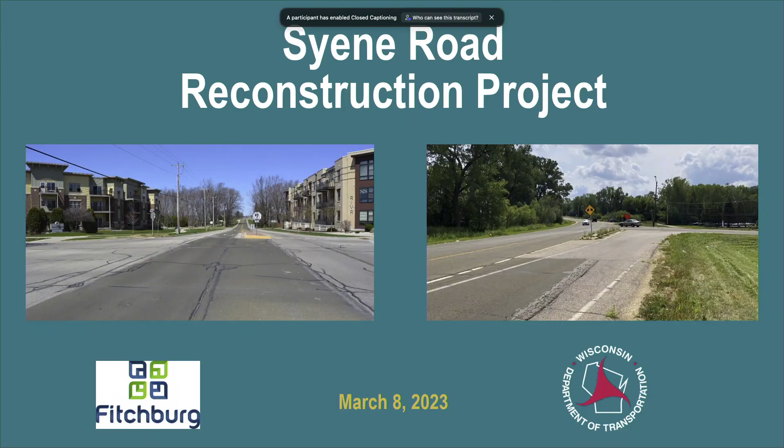I'm Tim Volker. I work for the city of Fitchburg. I'm the director of public works, city engineer. I've been here about 6 weeks now, and I'm getting very well acquainted with this project.

So here we also have our consultants on the project. You might recognize some faces from previous meetings. KL Engineering, we have Kevin.

I'm Kevin Wayner with KL Engineering. Been with KL for about 8 years and doing this for about 10. And I have a microphone, so I'm good.

I'm Samantha Herheim. I'm with KL Engineering. Kevin is our traffic engineer on the project. I'm the design project manager. We do also have Josh from our office who is working on construction oversight for phase 1.

Another important part of our team, someone who is not here with us tonight, is Lorraine Betzel. She is the Wisconsin Department of Transportation Local Program Project Manager for the northern section of the project, from West Clayton Road to the McCoy Road intersection.

The presentation tonight will follow this agenda, but before we get started, we just wanted to acknowledge the pedestrian fatality that happened on this road early this year. We don't have any of the accident data yet, but when that accident report becomes available, we will review and see if there are any improvements we can make with the project.

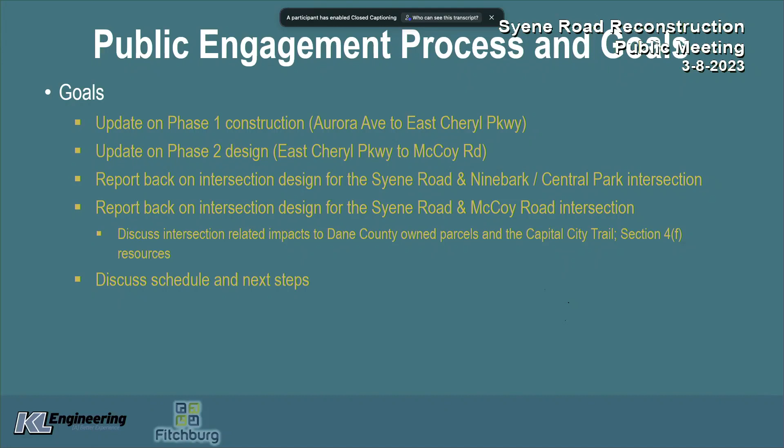The goals for tonight's meeting: we want to provide an update on phase 1 construction, that's the section between Aurora Avenue and East Cheryl Parkway, and an update on phase 2 design, which is all of the work north of there. We want to report back on intersection design for the Syene Road and Ninebark / Central Park intersection, report back on intersection design for the Syene Road and McCoy Road intersection, discuss intersection-related impacts associated with that intersection design, and talk about schedule and next steps.

That southern portion that's under construction is Aurora Avenue to East Cheryl Parkway, shown in red on this location map. It's under construction currently. The East Cheryl Parkway to West Clayton Road segment we're showing in yellow. That portion has local funding for construction and is planned for 2024 construction.

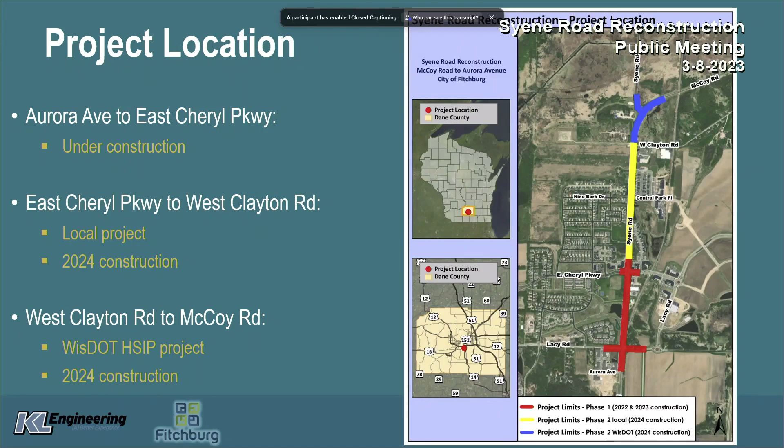The West Clayton Road to McCoy Road section, shown in blue on this map, has Wisconsin Department of Transportation Highway Safety Improvement Program funding and is planned for 2024 construction. There are some requirements for the Department of Transportation funding project, so we'll cover those throughout the slides. The slides actually look just a little bit different so we can differentiate between the two funding sources.

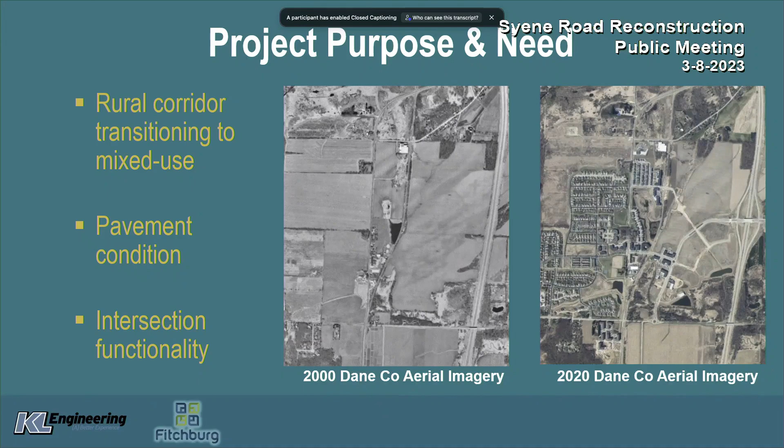The need for this project is really that this was a rural corridor that over the last couple decades has transitioned into a mixed-use, more urban corridor. We need to address the pavement condition and also the intersection functionality. Now I'll turn it over to Kevin to talk a little bit more about the McCoy Road intersection specifically.

McCoy Road intersection is the location of some crash patterns related to, in our opinion, some of the congestion. Making that left turn from Syene Road was one of the reasons for this proposed change. There's delay for southbound traffic since it's not a continuous movement.

Syene Road tees into itself in a way and meets up with McCoy Road. It's kind of funny, incidentally, at one point Syene Road was continuous north-south, so this would take things back to the way they were at one point.

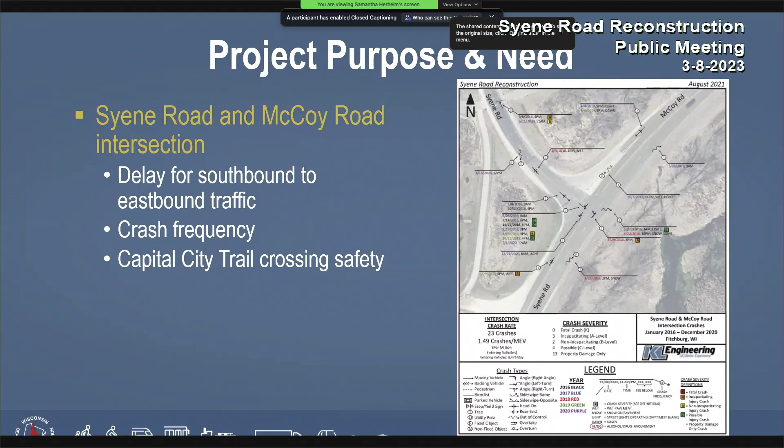The big reason to take McCoy Road and make Syene Road continuous is related to the Capital City Trail crossing. It presents a good opportunity for signalization to add a traffic signal at that crossing movement.

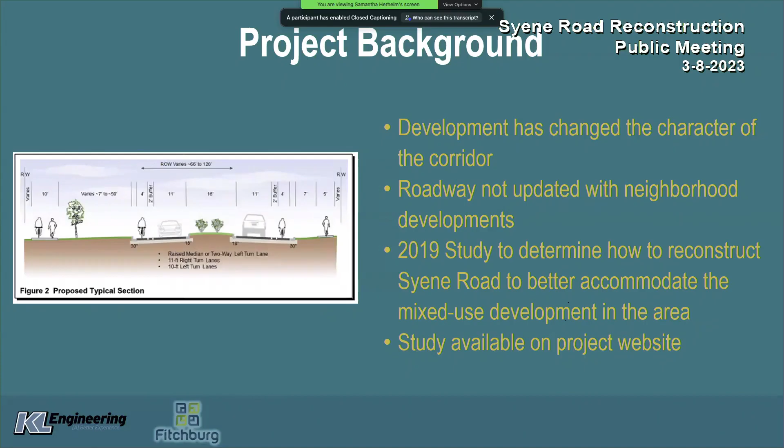We will include the link to the project website at the end of the presentation. In 2020, KL was hired to work on the design, starting in late 2020. We started with the recommendations from that 2019 study and worked on additional concepts and alternatives.

We also had some geotechnical exploration that happened, and found that additional subsurface improvements underneath the roadway would be needed, which increased the cost estimates. So we revisited those concepts and alternatives to see if there were other cost-saving measures that could be explored.

The project was split into phases in 2021. This allowed additional time for public engagement with city staff. The northern portion, shown in blue, was able to apply for and receive federal funding through the Wisconsin Department of Transportation Highway Safety Improvement Program. The middle portion, shown in yellow, also applied for federal funding but was not successful.

Phase one, the red section, started construction in 2022. That construction is currently shut down for the winter, mostly, although you will see some work happening outside of the roadway. The contractor is working on stormwater management improvements, and there are some private utility relocations happening. Construction will start back up in the spring, we think April 1st, but that's tentative and will be dependent on weather.

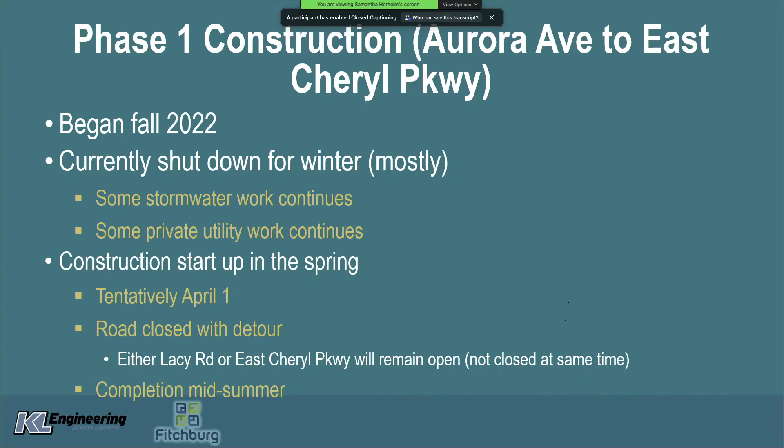When construction starts back up, there will be a road closed with sign detour condition. For local traffic, we'll either have Lacy Road closed for construction and have East Cheryl Parkway open, or we'll flip-flop, so one of those intersections will always be open for local traffic. We expect construction to be completed mid-summer.

Improvements along the corridor include sanitary and water main adjustments, a short water main extension near West Clayton Road, stormwater management improvements, lighting at intersections and select locations, speed reduction measures, which we'll talk about later, and some vertical alignment improvements, which we'll also discuss.

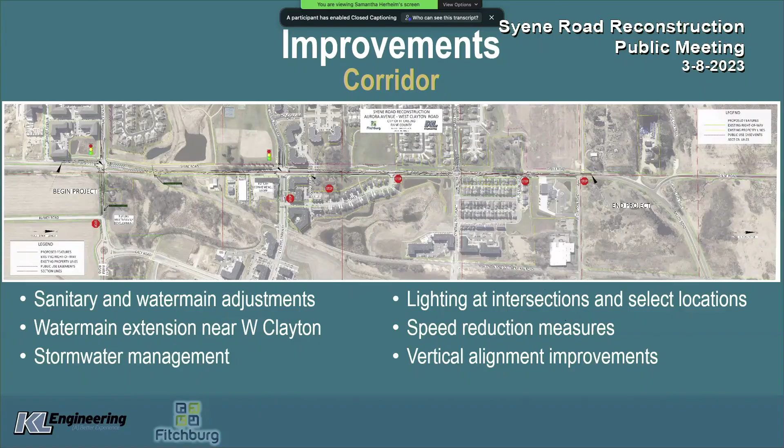The roadway will have a 10-foot travel lane, a 6-foot bicycle lane, two feet of which will have a painted buffer. There'll be painted and raised medians approaching intersections, an addition of curb and gutter, and the sidewalk on the east side will primarily remain in place, although we do have to do some spot improvements.

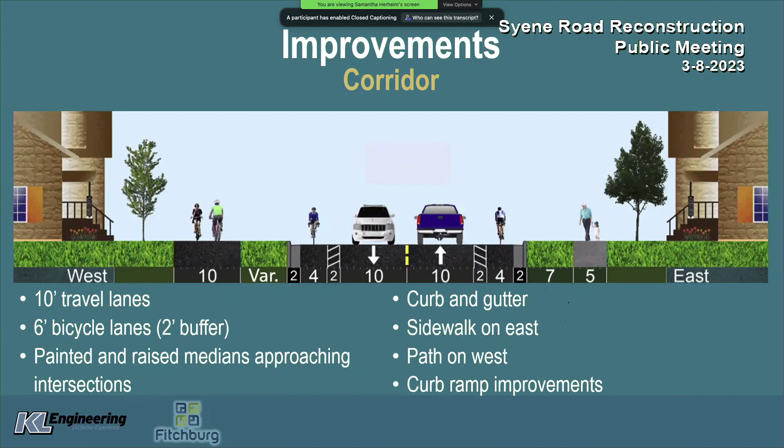Same for the path on the west side—it'll primarily remain in place with some spot improvements, and there will be curb ramp improvements at the intersections. Now I will turn it over to Kevin to talk about intersections.

Starting from the No Oaks Ridge intersection, going over some of these proposed improvements and explaining what they're expected to do. At this intersection currently, in the rural configuration, there's a bypass lane, which is a typical treatment for an intersection like this. As we urbanize the corridor, the intersection is currently planned to have a left turn lane.

This would help bring more predictability to traffic. People will use the left turn lane every time—there won't be a will-they-won't-they situation of using the bypass lane or not.

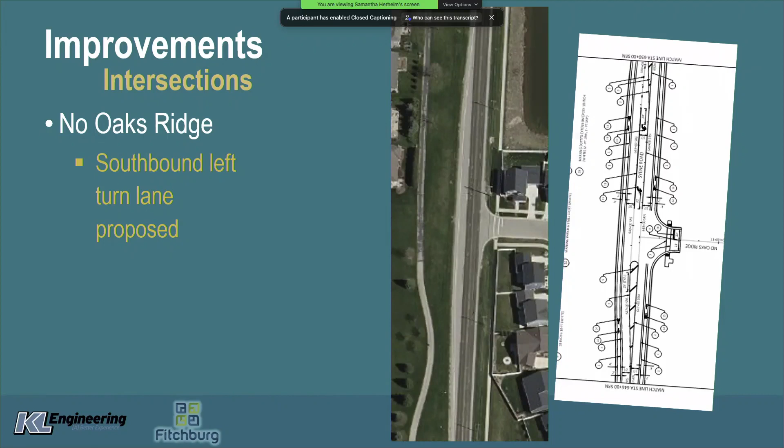So this helps assign where people should be as they're utilizing the intersection, which should be a benefit to pedestrians as well, just increasing predictability of drivers in the area.

Moving on to the Ninebark intersection, this is currently proposed as a roundabout. Some features include its size - it's somewhat smaller than a typical roundabout, certainly not a big DOT roundabout you'd see at an interchange. One benefit is to promote slower speeds, which is a safety benefit to pedestrians who are trying to judge crossing traffic.

This configuration would offer bicyclists the option to exit the bike lane and use the shared use paths to transit the intersection. Bicyclists, of course, would also have the option to transit the intersection in the travel lanes with other vehicles.

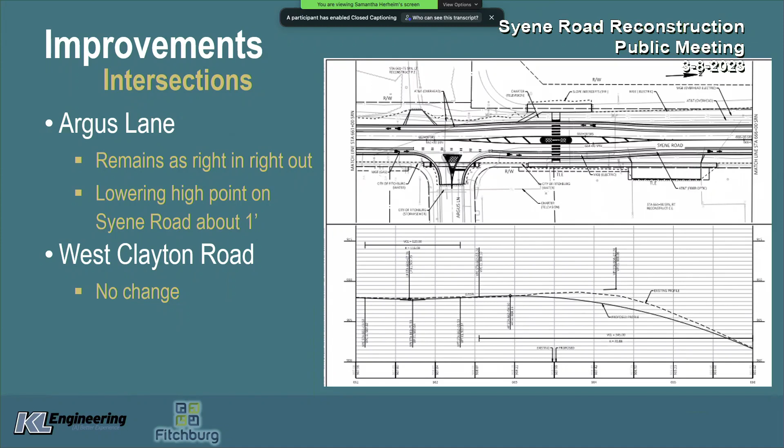Argus Lane is currently configured as a right-in, right-out intersection, with that triangular island helping enforce the access restriction for left movements. That's proposed to remain, with similar geometry after construction. I'll get into it later, but this is a location, or nearby a location, of a potential mid-block crossing.

This intersection is also near that vertical curve. This profile is showing the elevation of the roadway as you travel to the north. The dashed line is the existing profile, and the solid line is the proposed roadway's vertical configuration, which would help with visibility when you're looking over that hill.

Just to mention Clayton Road before I move on to McCoy, no consequential changes to the configuration of that intersection are planned right now.

Backing up a little bit, this is the section of the project that would be funded through the WisDOT HSIP funds, so this is a slightly different segment of the project. The current planned improvement would be to align Syene Road so it's continuous northbound, southbound, and McCoy Road would tee into it. The intersection would be controlled with a traffic signal.

One of the features would be taking the Cap City Trail, which currently crosses closer to the trailhead, away from the intersection, and bringing it to the intersection to provide a signalized pedestrian crossing. This would be similar to MM and McCoy Road, which was recently reconstructed.

There are signal timing and phasing options to help so that cyclists don't get stuck at that pork chop island, so in a sense it's a single stage crossing despite having to transit through the pork chop. These islands are generally recommended to help funnel traffic, make things safer for pedestrians, provide a refuge for pedestrians, and limit which way you have to look for approaching traffic when judging whether it's safe to cross.

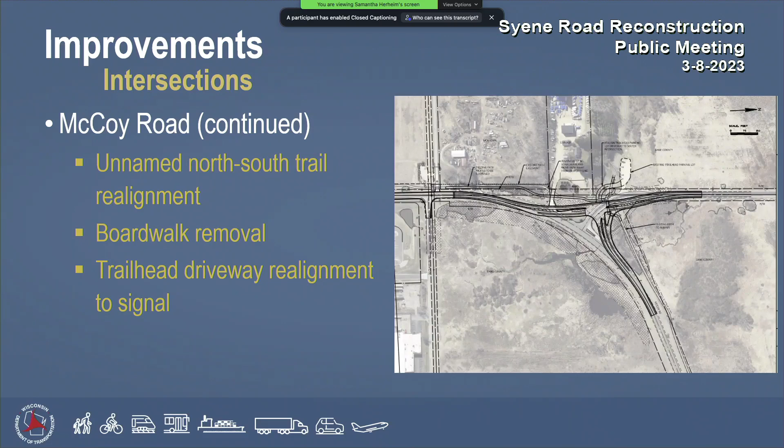There's a lot of requirements associated with the federal funding going into this intersection realignment, so some things we're required to evaluate and consider are the impacts to the Dane County parcels in this area and also the Capital City Trail.

We've done quite a bit of coordination already with Dane County and with the DNR. What we're planning at this point is that part of this intersection realignment will require some real estate acquisition from one of the Dane County parcels. We'll be giving back some of the existing roadway right-of-way to essentially make that parcel whole.

Another thing we'll be doing is keeping the Capital City Trail usable - it'll be open the entire time construction is happening. It will be staged; sometimes there'll be a gravel surface, sometimes temporary connections, but essentially you'll always be able to go through that area as construction is happening around it.

We will continue to coordinate with the DNR, with Dane County, and there may be additional requirements, but for now that's what we're planning, and we're working through all of these requirements through the Department of Transportation process.

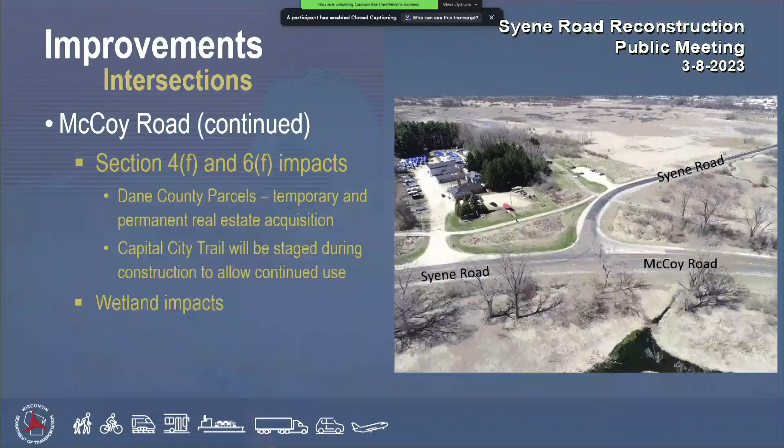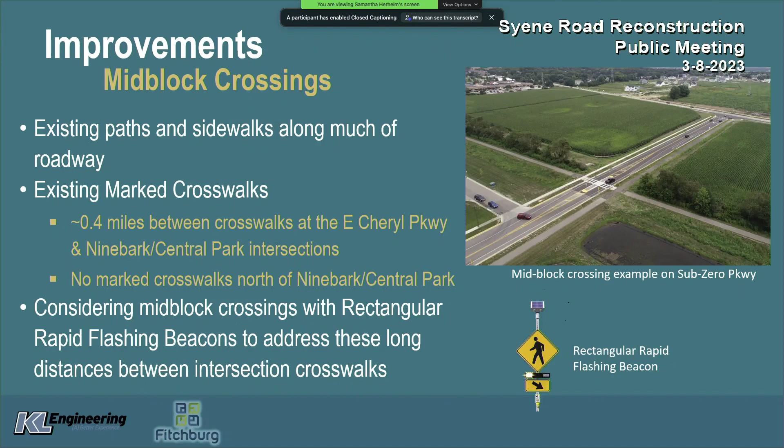There are some mid-block crossings being considered with the project. A mid-block crossing is a location where a pedestrian would have the right-of-way. According to state law, outside of an intersection, if there's not a marked crosswalk, the pedestrian would not have the right-of-way. So this would address the long spacing that currently exists between legal crosswalks along the corridor. Any of these considered would include an RRFB, which stands for Rectangular Rapid Flashing Beacon—those yellow flashing lights that catch the driver's eye and indicate a pedestrian is at the crosswalk trying to cross. They're actuated with a button and stay on for a period until the pedestrian can cross.

Some specific locations where they're being considered: one at Nannyberry Park, where there's currently a path on one side and a sidewalk on the other—this would form a connection between the two. This location works because of the grade, which is kind of the impetus for its placement. The other would be north of Argus Lane. This location avoids impacts to the path so it wouldn't have to be reconstructed as it curves, and it also avoids impact to the historic property, since this is the lot line where that property starts. As I noted before, the project will also take the grade down on Syene Road to improve visibility for pedestrians and motorists.

Question: is it kind of where people are already crossing, where it's already worn in, like right out the door? It's around there, yeah, a little bit further north. Okay, yeah, actually where it's worn is on the other side of Argus.

So tonight we're requesting feedback on the inclusion of these. We're specifically looking for feedback on the locations and the inclusion of these crossing locations.

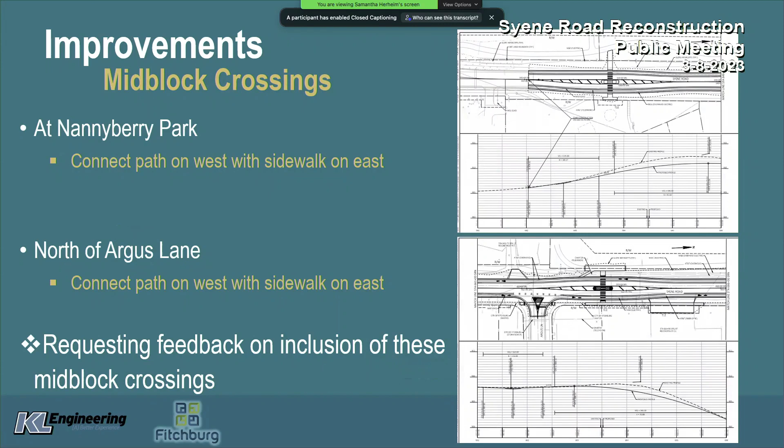Before we switch off this slide, I apologize—I will just add, currently we're showing the crossing slightly offset from Argus Lane. We could also consider moving it closer to Argus Lane. That would change the impacts to the existing trail on the west side—we would have to do more reconstruction of that trail, and it would mean more potential impacts to that historic property, but that is another alternative we could look at.

Sorry about that, Kevin. Not at all. What are you going to talk about?

One of the things this project is including is on-street parking. This is north of Central Park Place, between the Central Park Place to Argus block, on the south end of this block. The reason this is proposed is currently there's a roadway and a ditch, so package and food delivery trucks can pull off and be on the side of the road. Once we add curb and gutter, that won't be possible. So if we were not including parking, a delivery vehicle could pull over but would be blocking the bicycle lane and partially blocking the travel lane.

On the south end, we have that roundabout, and we'll have a raised median coming north from that intersection. If a delivery vehicle pulled over there, they could potentially block all traffic. Moving north of that median, a vehicle could drive around the delivery vehicle, but might have to cross the center line. So what we're proposing is dedicated space for the through lane, bicycles, and parking. We're also keeping an open space meant for utilities. We're focusing the parking on the southern portion of that block, heading north, and limiting impacts on the west side—near that historic property, the existing pavement line on the west side will be the same as the proposed pavement line.

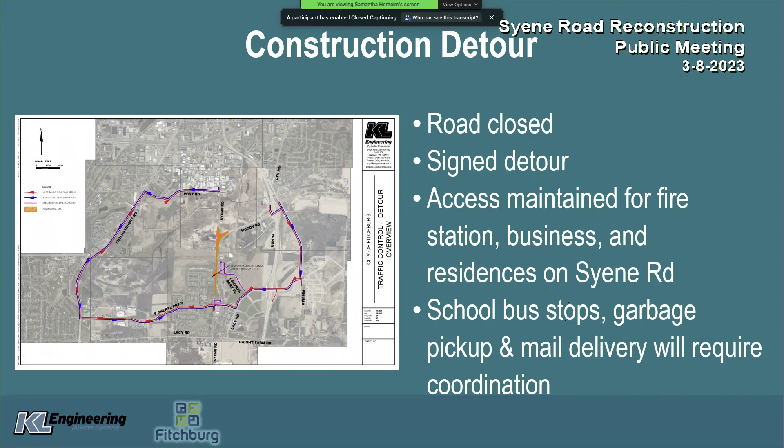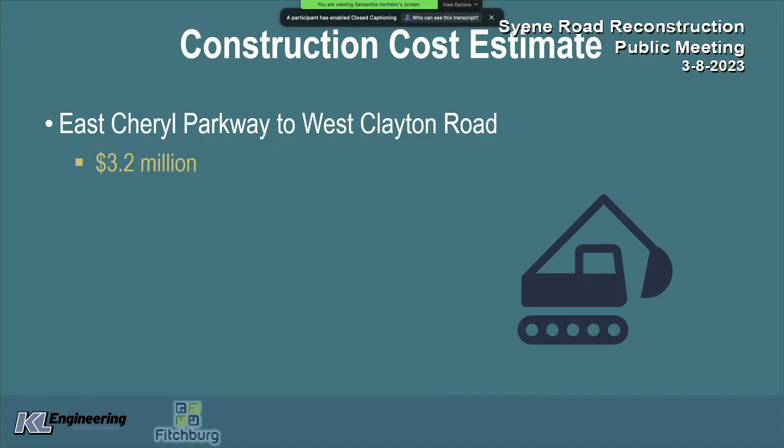The cost estimate for constructing that East Cheryl Parkway to West Clayton Road segment, the middle yellow segment, is $3.2 million. The northern piece is $2.9 million, which includes federal funding of $1.7 million.

The project schedule—yes, you were mentioning access to the roadway. For Uptown Crossing, we don't have actual driveways connected to the road. I assume we would still be able to use the roadway to get to our homes? There will be access from the side roads, but there won't be through traffic all the way up and down the site.

Good question. Part of that decision was made because of what we saw with the construction that's been happening. We tried to keep traffic open, and we were actually creating more issues with potential accidents, to the point where it actually slowed down construction. So by closing that off, they can hopefully complete construction quicker and safer.

I wish you guys would have done that down on Syene and Irish Lane. We were told by the city of Fitchburg that they couldn't shut Syene down. They had road closed signs on it, but they wouldn't shut the road completely down with barricades. The guys putting in the water main were very scared for their lives that whole time, and it cost them over three weeks. That doesn't surprise me. But Fitchburg wouldn't shut the road down.

So part of that too is we've got to be careful with shutting it down to the point where you don't have emergency access. The problem we typically see is people moving barricades. So we'll try to shut it down, but you'll have people who still feel like they can write their own rules.

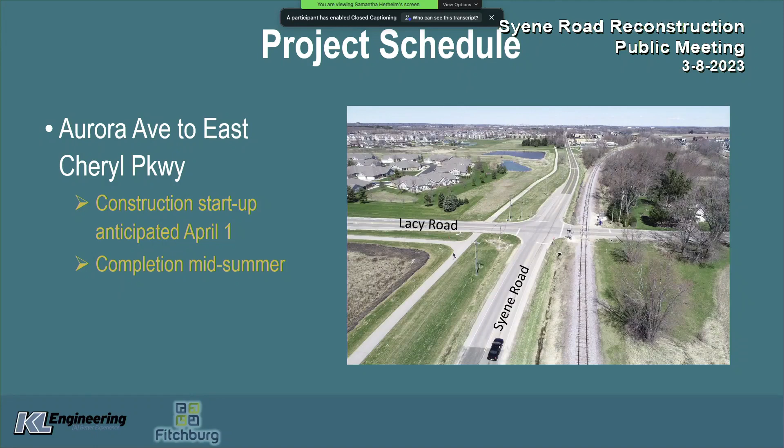Yes? Just one question.

When they were paving up to the railroad tracks on Irish Lane, I was talking to a couple of the guys riding around in the white pickup trucks of Fitchburg, and I said, you can't shut the train down. Sometimes they got pretty darn close to the train tracks. So Lacy Road is awful - that summertime, that's a busy train.

So that project does include upgrades to the Lacy Road railroad crossing, and we did coordinate that with the railroad. They are including new crossing panels at that crossing, and they'll be doing that work in coordination with the roadway contractor. We had looked at a lot of different time frames. They do shut down in the winter for 2 or 3 months, depending on weather.

For the East Cheryl Parkway to West Clayton Road segment, the middle segment shown yellow on the location map - for the project schedule, we're anticipating real estate acquisition, that's the temporary easement for grading, in late spring, early summer of 2023. We'll have final plans at the end of 2023. It'll be a city-let project at the beginning of 2024 with construction in 2024, and we expect the project to take the entire construction season.

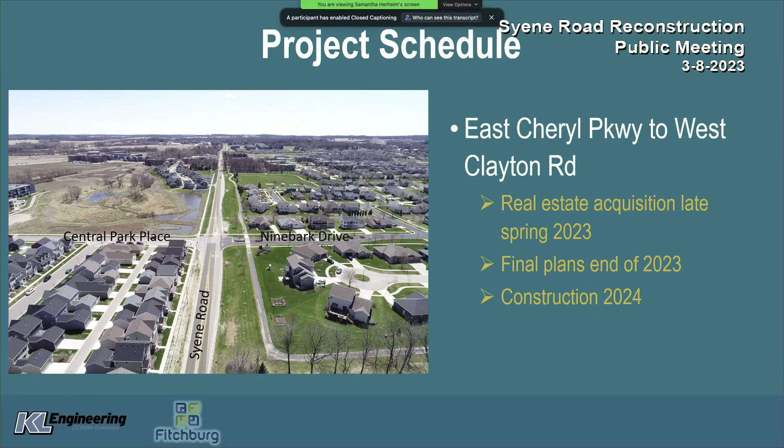For the segment on the north end, the West Clayton Road to McCoy Road segment, as you can see from the project schedule there are a lot of additional submittals - those are really DOT required submittals. What I want to highlight is that we anticipate real estate acquisition likely in the June to October timeframe. We'll have final plans due to the Department of Transportation on November 1st, 2023. It'll go through their letting process in February of 2024, with construction during the 2024 construction season. We think this piece will also take the full construction season.

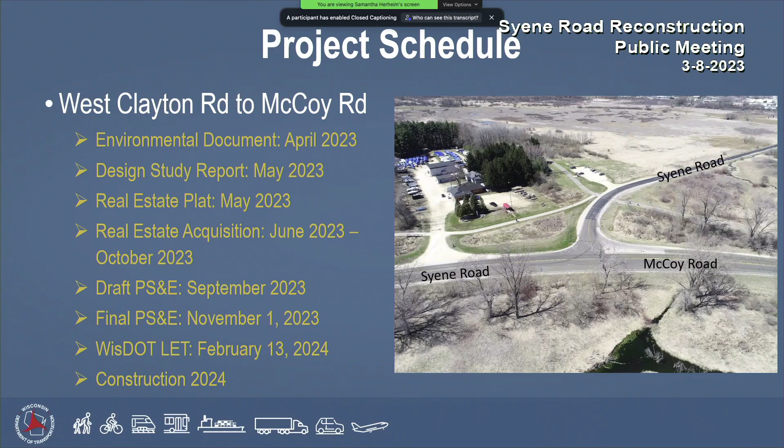Now there is the possibility that we'll have two separate contractors, one for the middle piece and one for that northern piece. We will require coordination between those contractors.

So how you can get involved - stay notified. The city of Fitchburg has this great feature called Notify Me, on their city website. We have the link here. You can sign up for updates on topics or projects and you'll get an email notification. You can check the project website, we have the link here, or reach out directly to the design team - our contact information is provided. We are requesting feedback by April 5th.

Please remember, we're specifically encouraging feedback on whether or not those mid-block crossings should be included with the project.

Tim, do you have anything else you want to make sure we touch base on before we open it up to questions? Just wanted to thank everyone for coming out. We look forward to your input. Any questions we can answer now, and then walk around and look at the exhibit that KL printed off for us on the table here - that's just about it from here.

We will have the presentation and exhibit materials on the project website. The materials from the previous meetings are all included there as well.

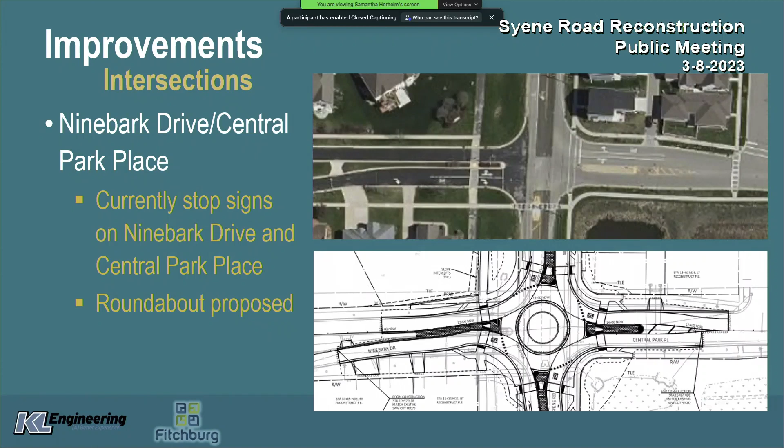I think the question's related to the raised medians that would be added. So if your driveway would be across from a raised median, that would limit your ability to turn left into or out of your driveway. But the convenient thing about a roundabout is that, for instance, if you couldn't make a left turn, you'd simply make a right turn and then a U-turn at the intersection. The area here does have an existing raised median, so we won't be changing that condition.

My house is right on the corner, so I'm wondering about the entryway to the alleyway there. If you're coming northbound and turning right, would you be able to get in there, or is that an actual median? So this part right here is actual median, and this part right here, I hope you can see my cursor, that's paint.

How much of a raise is on that median? Six inches, like a standard curb. More like a speed bump? Not sharp edges, more gradual. It'll be flat faced for the median areas here. The curb around the roundabout is a little different - that's kind of flatter, just to allow for trucks to track within that inner circle.

More questions? All right - in any of the three phases, will the speed limit be lowered? It will not. The speed limit was lowered from 45 miles an hour to 35 miles an hour back in 2019. We do believe that the improvements we're making to urbanize this roadway will encourage slower driving.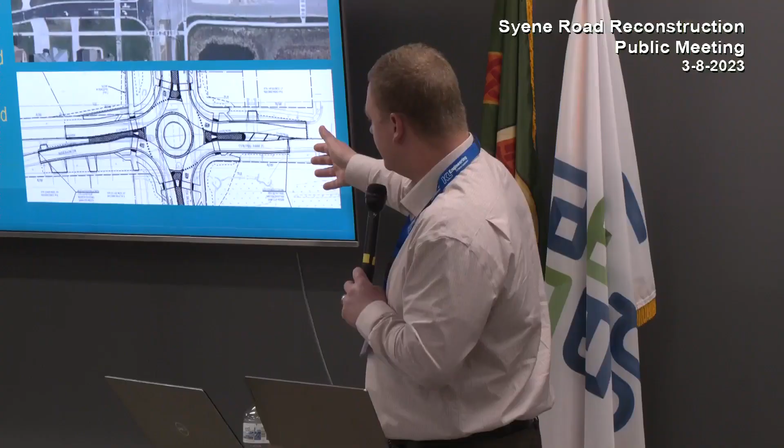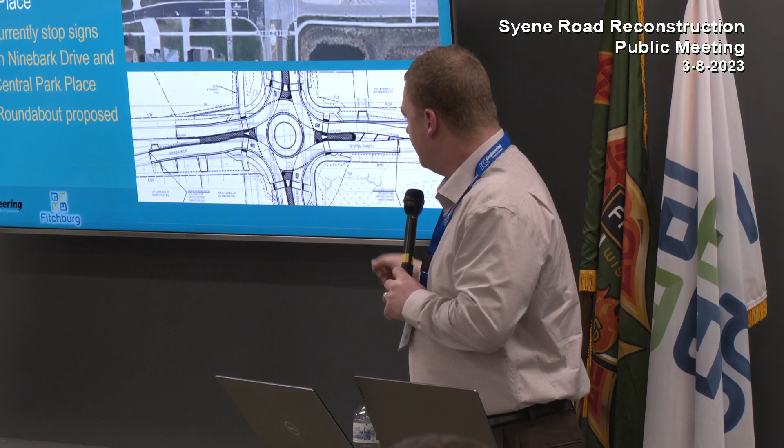This configuration would add a shared use path segment in these areas shown where there's a 10-foot pedestrian walk to accommodate a mixture of bikes and pedestrians. So like I said before, the bikes can exit the on-street bike lane and then utilize these to get through. You asked about pedestrians, but there could be some mixture going on between the two. And then each of these crossings, these marked crosswalks right here, will facilitate pedestrian movements. They'll be able to stop in the middle so that they only need to contend with one direction of traffic at a time, which is a safety improvement. Does that answer your question?

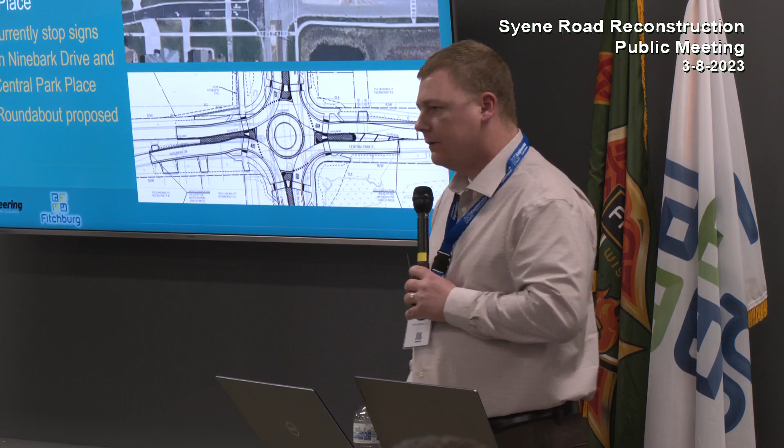Myself and some other residents, I live on Ninebark there, kind of on that left side of the screen. Currently our son and other children that we know cross the street across Syene to get to the other side, and it's already kind of iffy. Some traffic will stop, some traffic won't. Even getting to the middle and then going to the other side can be a little tricky, because the other side is waiting for you, but this side may not, so it's just a little dicey. That's really why I wanted to be here tonight, to see how that is going to impact pedestrian activity and help it be safer, since it's a nerve-wracking intersection to cross, with school bus drops that we all contend with.

Yeah, I think so. I think you had the question next. Well...

I and a couple of other guys I know, we go up and down Syene all the way up to McCoy. And the simplest way to stop these people from just thinking it's a straight shot through everywhere...

Fitchburg probably knows me best, because I want stop signs at a lot of intersections to slow my traffic down on Irish Lane. But why don't we put stoplights in front of Gervasi's?

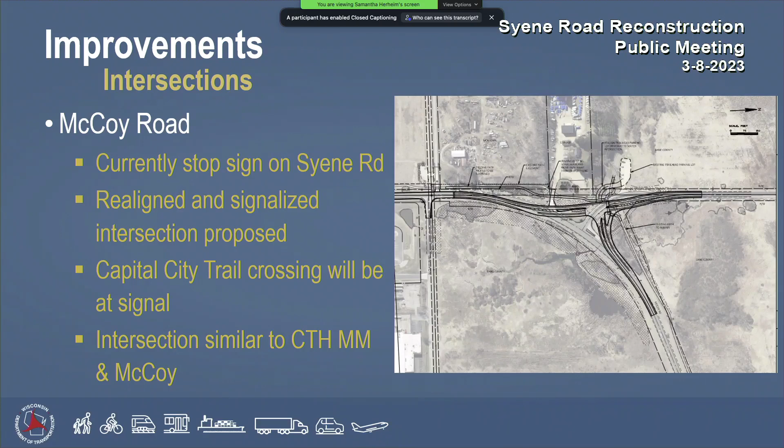When we had those ad hoc meetings several years ago, Andrew McFadden indicated at the time that the only measure we could implement that would give the intersection a passing grade for traffic flow is a roundabout. So I think that needs to be considered, and that's why I'm really glad to see this is still in here.

Also, the north side of the roundabout having the crossing lane I think is very positive, because that's another area that people will just cross since there's no crossing there. I'm glad to see that. I'm a big advocate for mid-block crossings. I think the more of those we're adding, it's just going to help everyone.

The closer you are to having a crosswalk, you don't have to make that decision of, do I want to walk down there versus just crossing right now. So I think that's all very positive.

And then the parking, which was mentioned, I think that's going to be a big support for our street as well, because delivery drivers every day are parking along that spot and risking it. I'm just waiting for, hopefully nothing happens, but it's a very dangerous spot for delivery trucks. I've mentioned it several times, like, don't park there, park on the alleyways, but you can only tell people so much, it doesn't happen.

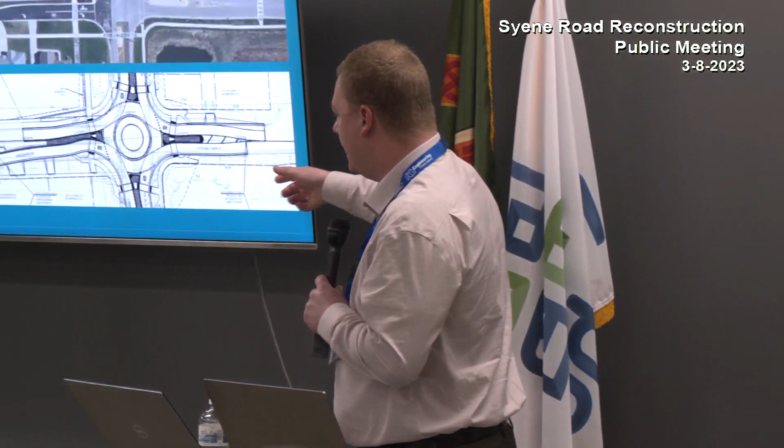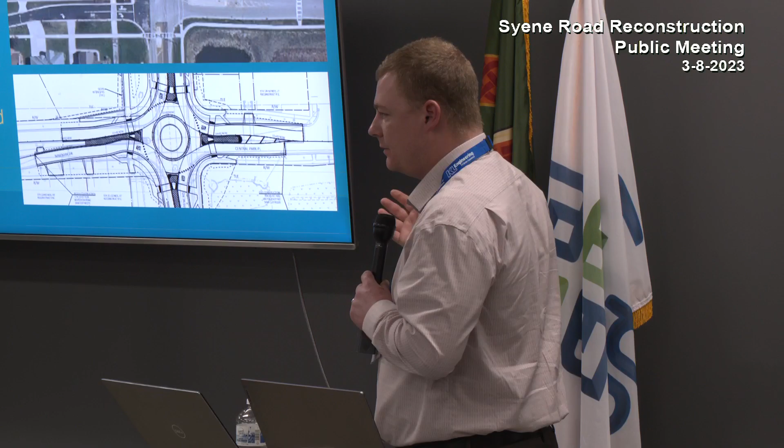Haven't determined it yet. But to your point about being able to see people coming, you are correct. This is somewhat of a smaller roundabout size than you'd normally see. The design intent is that people are physically forced to slow down. At some point people can go faster than they should, but that's all relative, so hopefully faster than they should at this roundabout is slower than most. I recognize it's also a shorter space, which gives you maybe the equivalent reaction time for deciding whether to go into the intersection.

So I hope you folks can be aware of that, and maybe you can plant clover or something in the middle as opposed to prairie grasses.

Just a minor clarifying question on the sidewalks on the east side of South Syene Road at Sherrill Parkway. There's the two existing homes with no sidewalk in between. Is the plan to put a sidewalk there? Yes.

Just a couple things directly in response to what the gentleman in the front row was talking about regarding this roundabout at the intersection here. As my husband mentioned, we live in the northeast corner, the house you can see in the picture there. Sorry about that.

I think early on in some other design meetings, and this may have changed, it sounds like you're still talking about planting and what's going to go in the middle of the roundabout, but there was a consideration that it might actually all just be paved and gradually raised. I think the idea was things like semi-trucks aren't going to be able to make such a tight turn with the radius the way it is, and to keep them out of there. So the consideration at the time was maybe not even planting anything there, just having it all be paved. Maybe that's still an option.

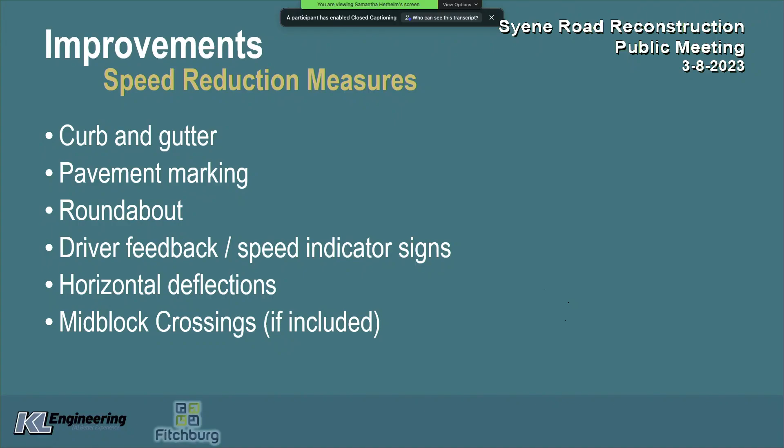Next one: what is the speed limit in the roundabout? There wouldn't be a separate posted speed limit, so the prevailing speed limit would be the legal speed limit. I think it would be very difficult to traverse that roundabout at 35 miles an hour.

It also asks, will there be pedestrian lights in the roundabout? There would not be, no. I suppose if they're asking about street lighting, there would be street lighting, but there wouldn't be a rectangular rapid flashing beacon or anything like that. Can we do a couple more?

Okay, go ahead. Fitchburg doesn't like speed bumps.

I've offered to pay for them on Irish Lane, same with the stop signs. I'd like to see who I can buy the flashing red lights up here on Syene, for when you're going over the speed limit. I like those flashing red and blues, that catches your eye. I don't know if that's going to help the speed limit on the racetrack on Irish Lane, but I think it might catch your eye. I did want to say, I'm so thankful those signs went up, because living on that street I've noticed the difference. It still can get a lot better, but having those up is really helpful. Yeah, it makes people notice, oops.

So the space right along here—I don't know that I have a great answer, but that last slide kind of showed part of it. I think the parking slide might help. Bear with me here. So the intersection is here, where the roundabout is going to go, and you can see there's some widening on this side that will take some of that green space, but not a tremendous amount.

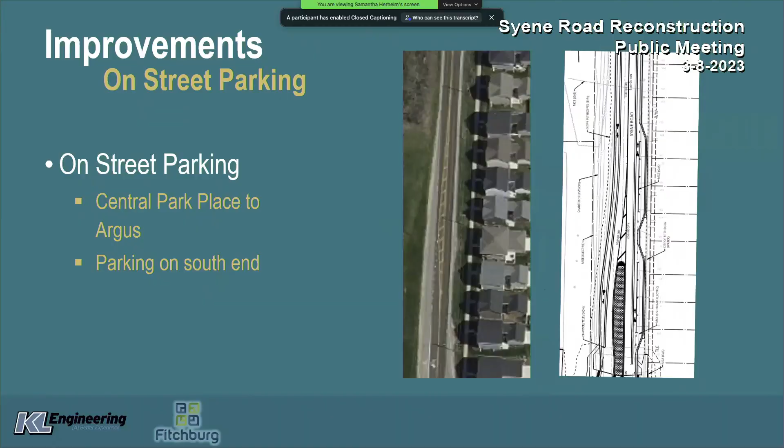You did a pretty good job of delineating it on this map here. Thank you. So it's taking some of the green space between Syene and the west side where the bike path is. Correct. The bike path itself will stay where it is originally, I believe, maybe because of the parking being added or what have you.

I was at the resident input meetings, and I didn't think at that point they were saying it wasn't supposed to be altered at all on the west side. But you're saying that's not the case? It will be altered between the existing road and where the path is. It will not be altered between the path and the homes, except right at the intersection—there will be some adjusting for that roundabout construction.

Will there be streetlights added on Syene between Nine Bark and East Cheryl? Between Nine Bark and East Cheryl—we are including streetlights at East Cheryl and at Nine Bark, and depending on whether or not that mid-block crossing gets included, we would look at lighting that crossing. We are not proposing continuous lighting.

Will there be streetlights put on the middle and north phase? At intersections and those spot locations like mid-block crossings. Again, not continuous, not lighting all the way up and down the road.

There was just a comment about the speed bumps—thankful to hear there's no speed bumps that would be installed, because that would be very noisy to residents.

Other questions? Just to clarify, the speed limit currently on Syene is 35—are you saying that posted speed limit will not be changed once the road has been reconstructed? Correct. Why is that?

It's still an arterial roadway, meaning the traffic volume and its location in Dane County make it a fairly major north-south corridor. So although we're making it more urban and trying to get people to obey the speed limit, we still need to move traffic through the corridor.

Go ahead in the back. The obvious comparison is Park Street in Madison, which is 25, and East Wash, which is 25. Yeah, so that's not a great argument—I used to work with the city. Those roads, South Park, East Wash, are truthfully not built to go 25. It's excruciatingly difficult because the road isn't built for it; it's a divided highway or divided road.

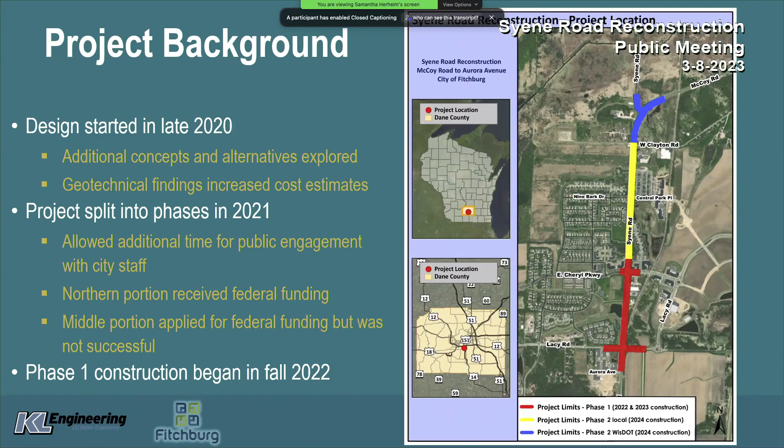Our route during construction to get to Madison or the Beltline would be to go down to East Cheryl, over to Fish Hatchery, and then north from there? Yes, or to Highway 14. Okay, alright, got it. Through Lacy or something like that. Okay, alright, thank you.

Last thing I'm gonna say on speed: I do think we could consider a subsection of that reduction, going down from the new T intersection to the roundabout. We talked about slowing speed down before you get to that roundabout, because there's nothing to say how fast you're supposed to go going in there.

The majority of the risk to people is along our stretch of Syene there, where the houses front the road. So you could look at a smaller section of speed reduction, and then possibly going up to 35 south of that.

From a speed standpoint, what we're seeing here at the fire department, just trying to pull out, it's this Daytona curve that we've got right here. When people are coming around, they're going so fast that they don't have predictability of what's coming out of these intersections. So I think having that T intersection will slow them down, because they have to negotiate a turn, and it's not gradual.

And I think if they start at 25, possibly - devil's advocate - they're not gonna speed up, and then they hit a roundabout, you're not giving them those opportunities to speed up.

Just a comment - I know it's not enforceable, but I think it's confusing. Right now we have a Hill Blocks View sign that says 30, followed by a speed limit sign that says 35 with flashers. There's a little bit of confusing signage. And I live across the street in the historic property, so I take it at 25 and make all the drivers behind me angry because I slow down. But that signage maybe could just be cleaned up in the meantime somehow.